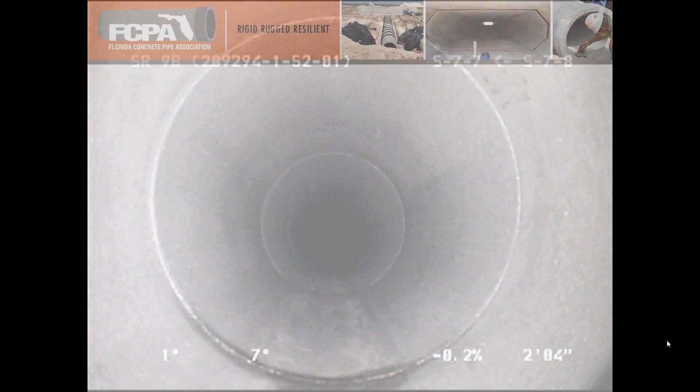Okay, thank you, Kim. So our webinar for February is post-installation inspection, where the rubber meets the road. And I'm one of your presenters today.

My name is Doug Holdner. I'm director of the Florida Concrete Pipe Association, which is basically a state chapter of the ACPA. And you're getting 3 presenters for the price of 1 today.

I've got with me Angel De Jesus with County Materials, a pipe producer. They're national, and they are with me here in Florida too. And then also Sarah Mayton, also with a pipe producer, Rinker Materials.

So let's start off with some brief introductions so that you know a little bit about your presenters. I have 23 years of civil engineering experience. Some of that was with consulting firms, and I was with a concrete pipe producer for about 13 years.

And for 3 years, I've been the director of the Florida Concrete Pipe Association. While with the pipe producer, I spent about 10 years doing quite a few post-installation pipe inspection assessments and reports.

I'm a licensed professional engineer in 2 states, and I'm a Texas Aggie, and I reside in Jupiter, Florida.

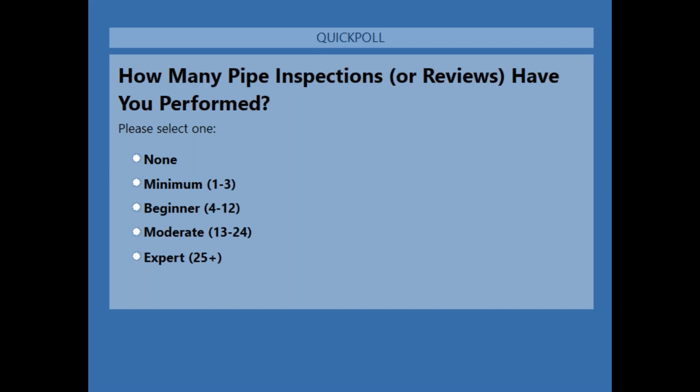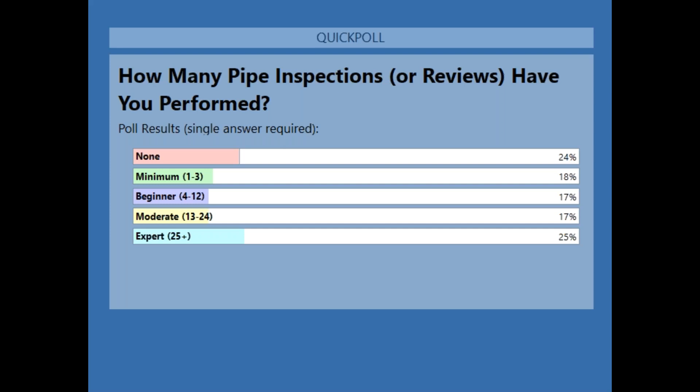All right, so again, we've had close to 90% answer. I'm going to go ahead and close that one and share the responses. So it looks like we have a good variety, Doug. 24% said none, 18% 1 to 3, 17% 4 to 12, another 17% 13 to 24, and another 25% are experts. Okay, great. So we have a very diverse audience in terms of background and also experience on this. Thank you for taking those two polling questions.

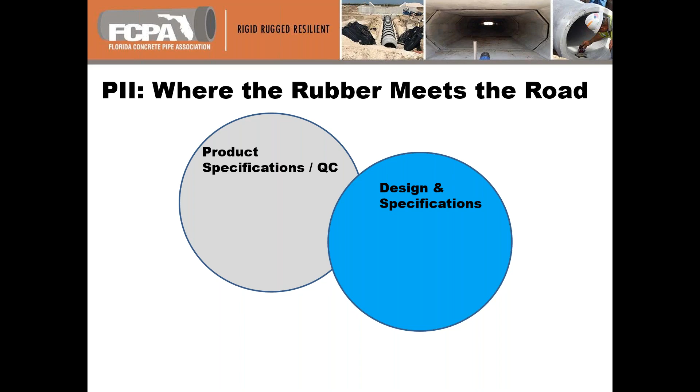So now why did I call this Where the Rubber Meets the Road? Well, if you think about a storm drainage project, it's a combination of different aspects. One is the product or the concrete pipe specifications. What I mean by that is that pipe is produced to certain specifications. For instance, it may be specified as a class 3 strength. So that is something that will be vital or important to the project. And then there'll be the design and engineer's specifications aspect of the project. That could be the minimum or maximum allowable fill depth for the pipe. It could involve the soil types specified for the embedment, like A1 or A3, and the compaction limits. It could be the defined areas of the embedment up to the spring line, or for flexible products, to 6 or 12 inches above the top of the pipe. And then the contractor has to execute the installation and follow those specifications and do a proper installation of the storm pipe.

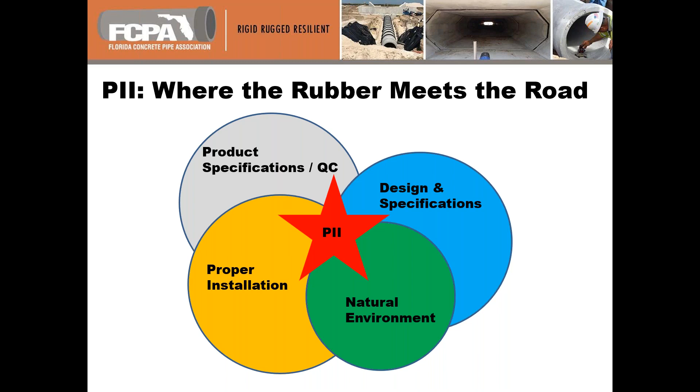And then you have a fourth element, and that's the natural environment. What I mean by that is you could have natural conditions like high groundwater table above the invert of the pipe. The groundwater could fluctuate seasonally, and you could have tidal influences. In some areas outside of Florida, you could have freeze-thaw conditions. You could have heaving soils. You could have very cold temperatures like you may have right now in February, and those could affect the brittleness or ductility of the pipe product possibly. And all four of these elements really culminate into that final opportunity to visually inspect the pipe in the post-installation inspection process. This gives the engineer the opportunity to assess all these factors and how they may be impacting the condition of that pipe before it's put into final service.

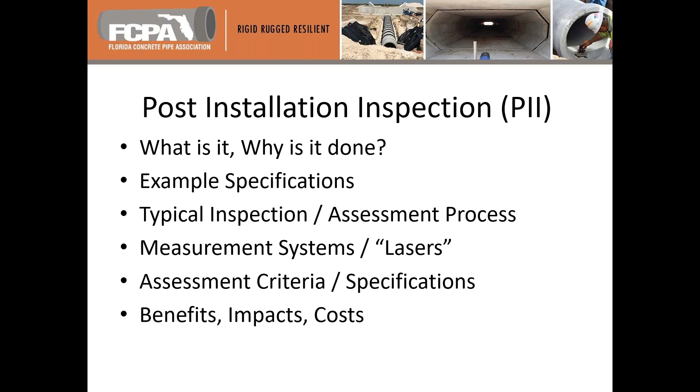Our agenda today is going to be what is post-installation inspection, for those of you who may not be familiar, and why it's done. We have some example specifications from agencies around the country. We will talk about the typical inspection and assessment process, and we'll talk about some of the equipment and components of inspection, for example lasers and measurement systems. And there's assessment criteria and specifications for rendering opinions of the observations. Then we'll conclude with some discussion on benefits, impacts, and costs.

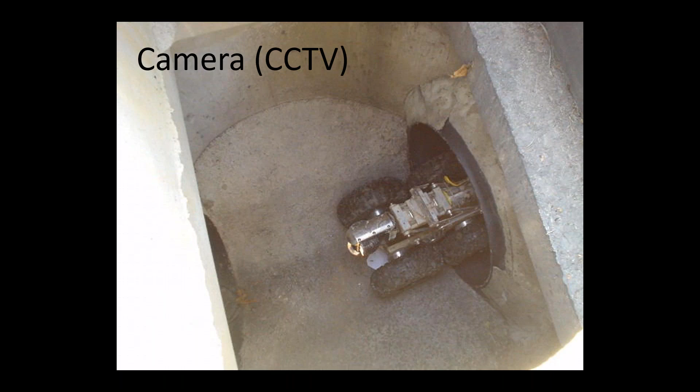Post-installation inspection at its basic level involves running a closed-circuit television camera mounted on a crawler through a storm pipe that has been newly installed. You can see that here with the camera entering a drainage pipe. Now the cameras come in a range of sizes because pipes come in a range of diameters. You may be inspecting a 12-inch diameter pipe, or a 48-inch, or maybe even a 60-inch diameter pipe, and it's important that that camera be centered in the pipe. Therefore you have a range of crawler and camera sizes like you see on this image here.

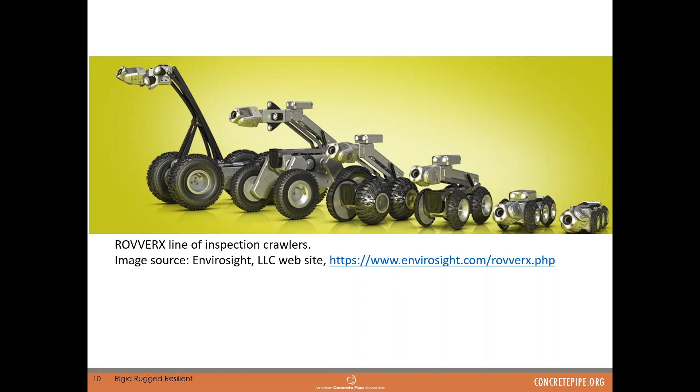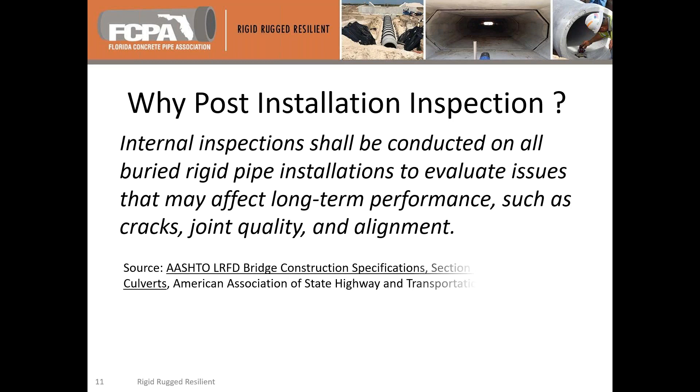Now, some of you may be wondering, why do post-installation inspection? This is straight out of AASHTO, and essentially for a concrete pipe, you want to assess the condition of the pipe and look for any type of structural distresses like cracks or joint quality, joint alignment, because you want to look for things that may affect the long-term performance of that pipe. That is a definition straight out of the AASHTO LRFD bridge construction specifications, section 27.

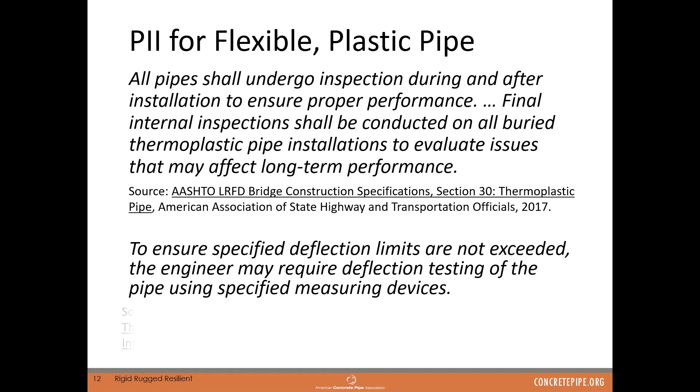Now for flexible pipe like thermoplastics, it's equally, if not more so important. The engineer should be inspecting the shape and any potential deformation of that pipe that could affect its long-term performance. There's similar language in AASHTO LRFD as well, section 30, and similar language illustrating the need for post-installation inspection for deflection limits in ASTM D2321.

Now, sample specifications. There are quite a few agencies around the country that require post-installation inspection. This is out of the Kentucky Transportation Cabinet Standard Specifications, Section 700. Kentucky requires that camera video inspection be done on all projects that have more than 250 feet of storm sewer and an ADT greater than 1,000 vehicles. I suspect quite a few projects would fit that minimum criteria. What they are doing is inspecting 100% of pipes that are under the road and 50% of pipes that are not.

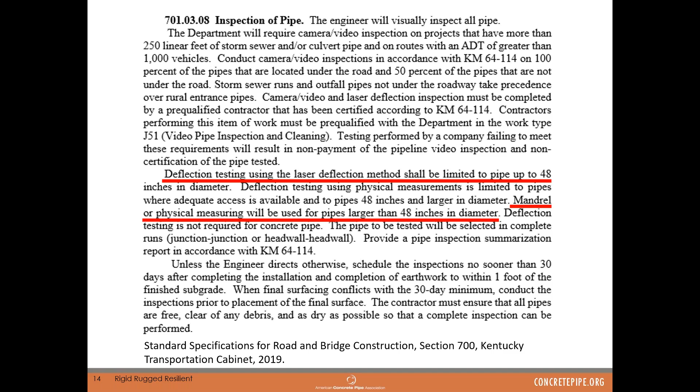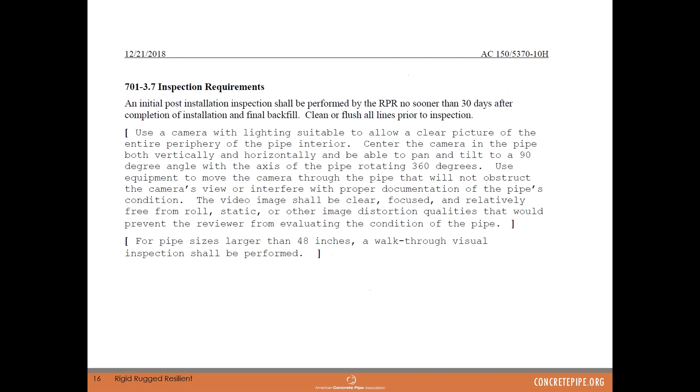They require that the video inspection contractor be pre-qualified, and then they require deflection testing for flexible pipe up to 48 inches in diameter. For pipe larger than that, they require some type of physical measurement or a mandrel to inspect for deformation. The Federal Aviation Administration, through AC 150, also requires post-installation inspection, and they stipulate no sooner than 30 days after the final backfill.

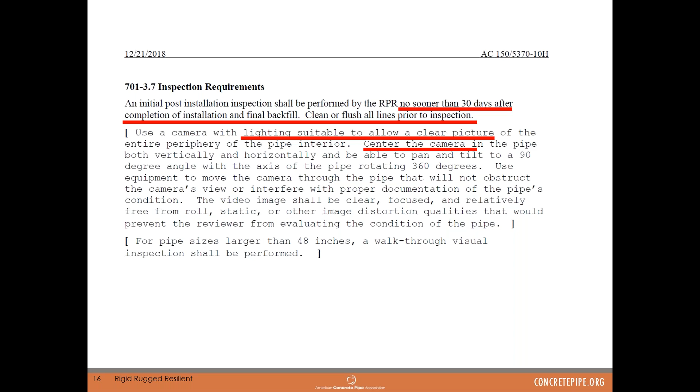They also want the system to be cleaned and flushed, and this is very similar to what you would find in the AASHTO specifications as well. And then, of course, you want suitable lighting so that you have a clear, visible image of the pipe, and like I mentioned earlier, the camera should be centered in the pipe.

Our home base of Florida has required post-installation inspections since 2006, and their spec requires that pipe that's 48 inches or less in diameter be video inspected. They want a video recording and also a report of observations in the pipe, such as cracks and joint gap measurements, tears, and things like that. For flexible pipes, they have the additional requirement of a pipe ovality report.

And I'm going to turn it over to my colleague Sarah and ask Sarah to describe the typical inspection process for a concrete pipe, from the time a CCTV camera is deployed in the pipe all the way through when you've been given a video and report to assess.

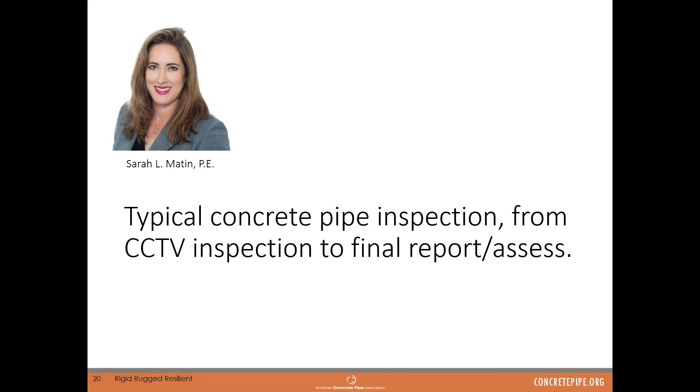So basic process: we typically will see the inspection done after it's been backfilled. The pipe is dewatered, which is very critical here in the South. Make sure it's clean, and that's important because we want to be able to see what's going on in the wall of the pipe. If it's dirty, it's more difficult.

For the CCTV, they're going to look at any imperfections that the videographer notices, so there is a little bit of judgment there. The report's only going to show what the videographer looks at. So it's important that you have someone who is experienced and certified, maybe NASSCO certification.

They're going to look at all the joints, take measurements, and we recommend that if they see a joint that is out of tolerance, they provide more than one measurement, a minimum of 3, so that an evaluation can be made if that joint is actually out of tolerance or if it's just a little askew at certain areas.

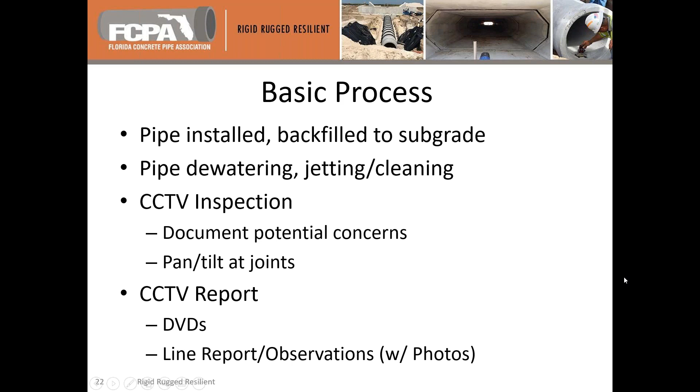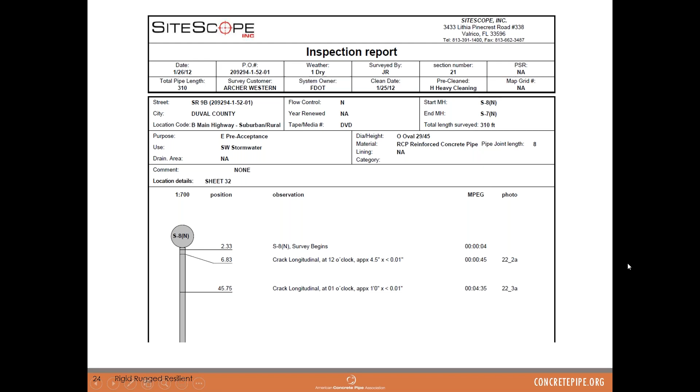Normally we just go through the report in areas where they call out deficiencies. We're not going to look at every foot of pipe—it's just not feasible. So if the videographer doesn't capture it, it might not be something that's looked at by a specialty engineer.

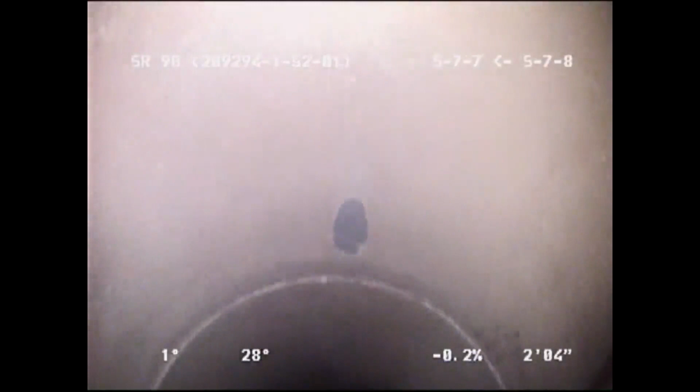All right, we're back. Here you can see the barrel of the pipe. The camera is panning around inside to give us an idea of what's going on. You can see a little bit of dampness, but that might just be at the bottom of the pipe. A little disoriented, there you go. Yep, so that's just at the bottom of the pipe. Looks nice and clean, no standing water, and that's per specification.

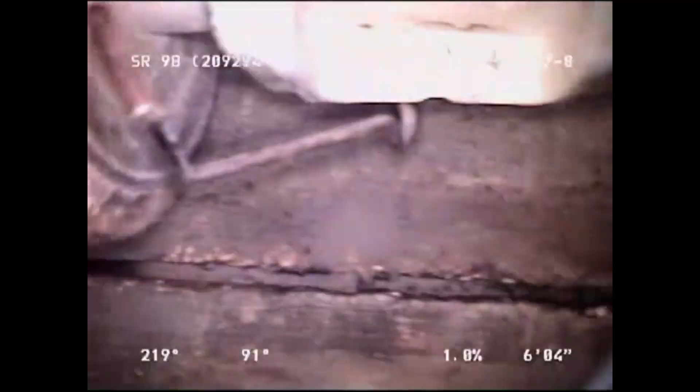We're going to go up and pan the joint and take measurements after we pan the entire joint. Yeah, that video doesn't show the entire joint, but it would go all the way around 360 degrees. Make sure you take a look at it first, and then provide measurements as required for whatever size pipe that is, and your municipality.

So continuing, once the report is done and the videographer has submitted that to the subcontractor or the prime, depending upon the job, if there are areas that need evaluation, that will be sent to a specialty engineer. A specialty engineer typically is someone employed by the manufacturer of that particular pipe. That's important because that person needs experience in the structural capabilities and design of the pipe so they can accurately evaluate cracks, infiltrations, and joint separations, if occurring, and provide that evaluation. During the report, there will be an area where repairs could be recommended depending on the municipality and what's required. Then the contractor, once repairs have been made, will need to re-inspect to make sure those repairs were adequate.

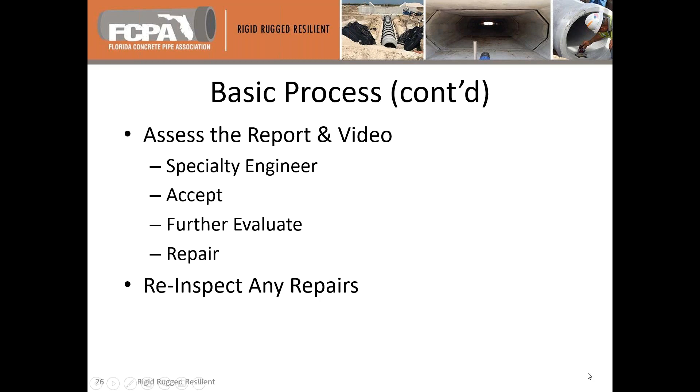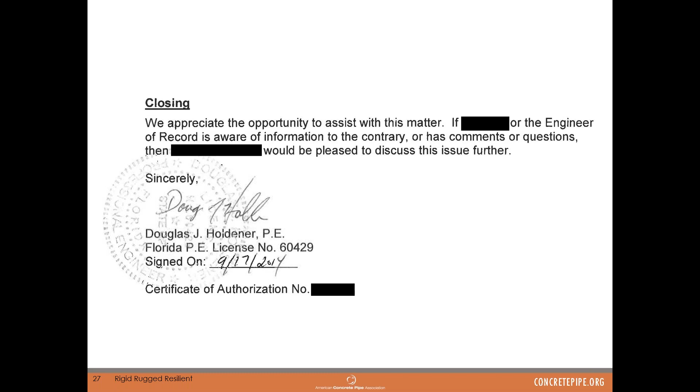All right, thank you very much for that, Sarah.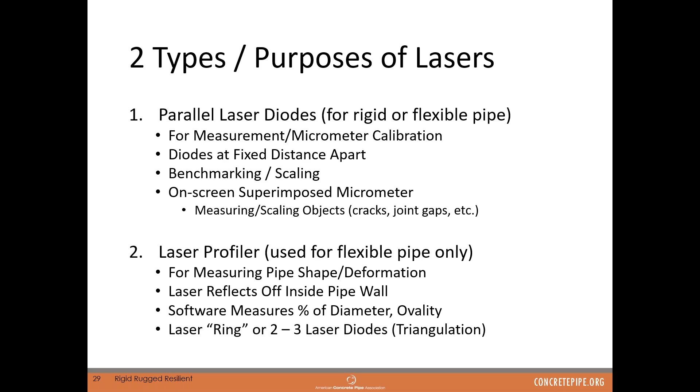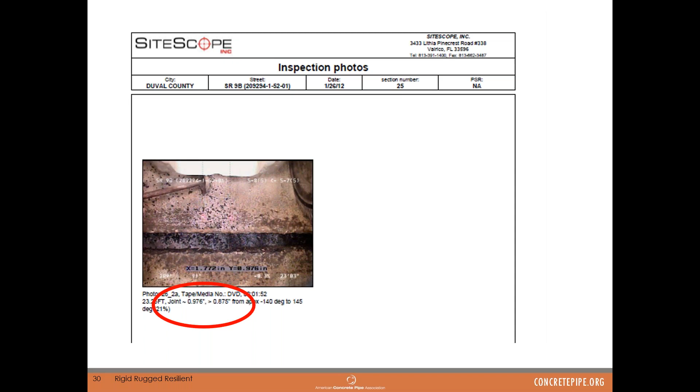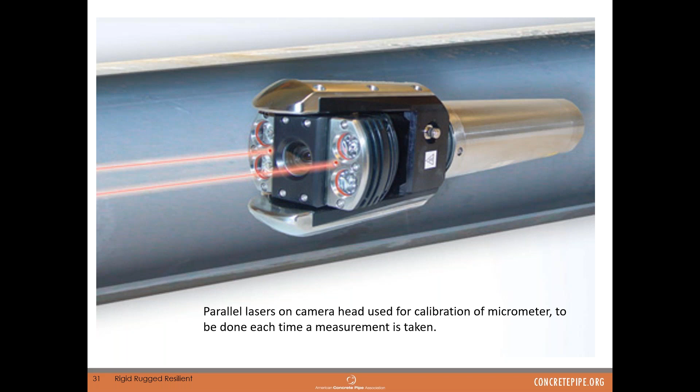So in the case of a micrometer and laser diode setup, if you have a situation where there's a joint gap—in this particular one, the contractor has measured a gap of about 0.9, or roughly under an inch—they did that using a micrometer calibrated with two parallel laser diodes like you see here. These diodes are mounted on the camera face, pointed 90 degrees at that joint gap. I'll show you what that looks like here. You can see the image of this concrete pipe wall, and you see two laser dots right there—those are those fixed laser diodes on the camera head.

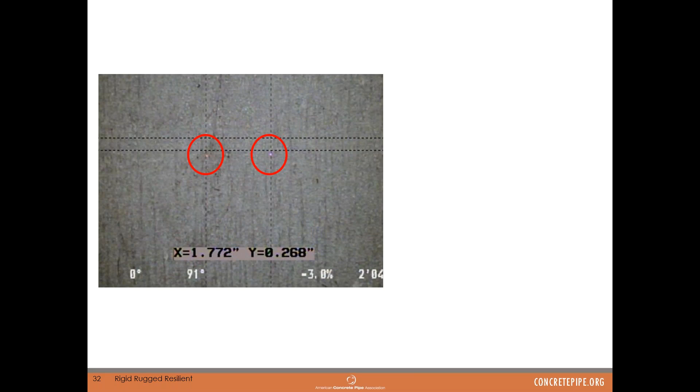And then the black dashed lines are the micrometers that are superimposed on that camera image, and they run through the little laser diode. That's the calibration process. Then the camera operator maneuvers those micrometers to the edges of the joint or the edges of the crack in order to do that scaling measurement.

There are other types of systems with the same premise. They may have a crosshair pattern to them. But the important thing to take away is that it's critical for measurement accuracy that the calibration step be done each time the camera is moved, panned, tilted, or zoomed. It must be done each time, and it must be 90 degrees perpendicular to the object being measured, or it will greatly impact the accuracy of the measurement. So I'm going to show you a video of a joint gap measurement so you can get an idea of this in action.

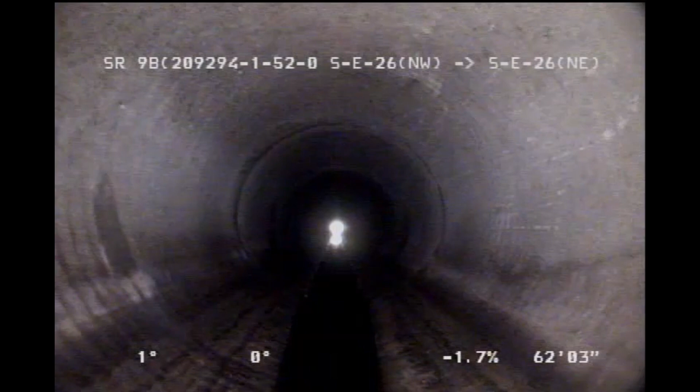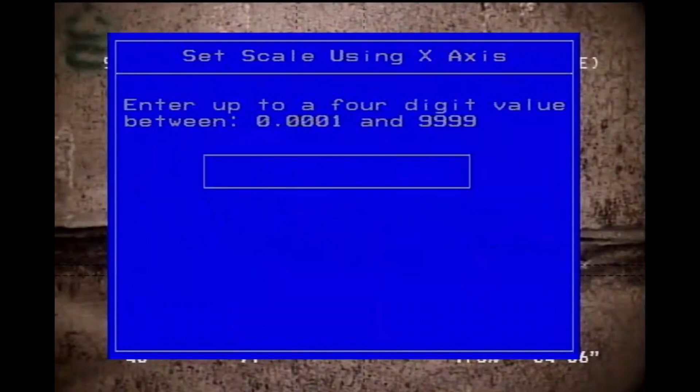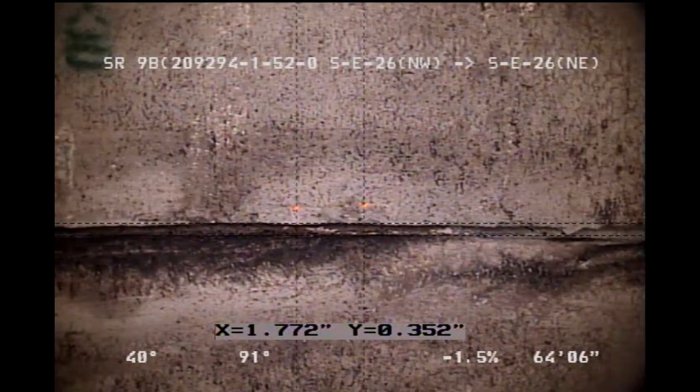So you have a camera, you come up to a joint, he's panning and tilting at the joint, and they're going to use the dashed black lines to measure that joint gap. But first they have to calibrate them, so they're positioning those lines through the laser diodes. They're calibrating, the diodes are 1.772 inches apart. Now the micrometer's calibrated, they can maneuver the black lines to each side of the gap, and they record an estimated measurement of about 0.35 inch. So that's the calibration process and the micrometer measurement process.

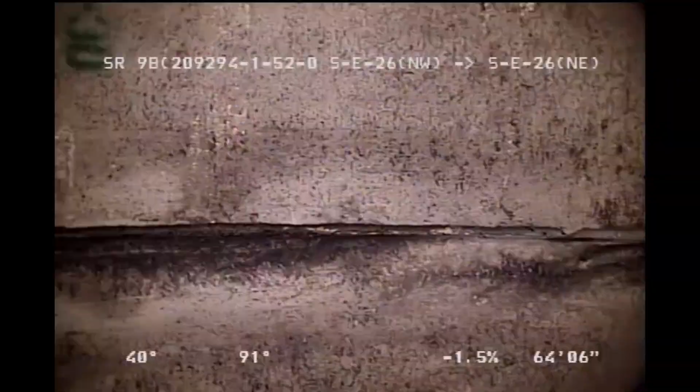Now the other type of laser equipment is the laser profiler, and this is a profiler that you see here on the screen. This is for measuring deformation, so it's best to show another video so you can see how these things are used.

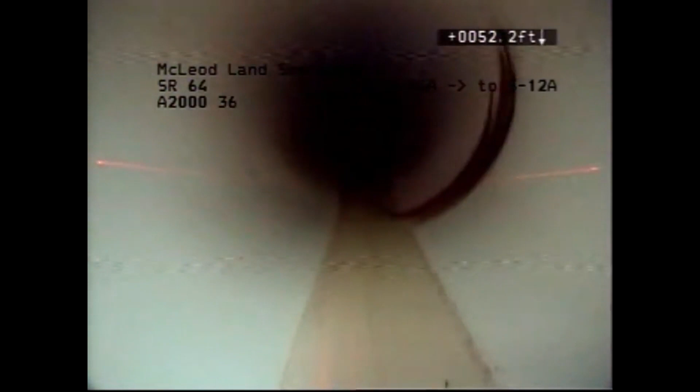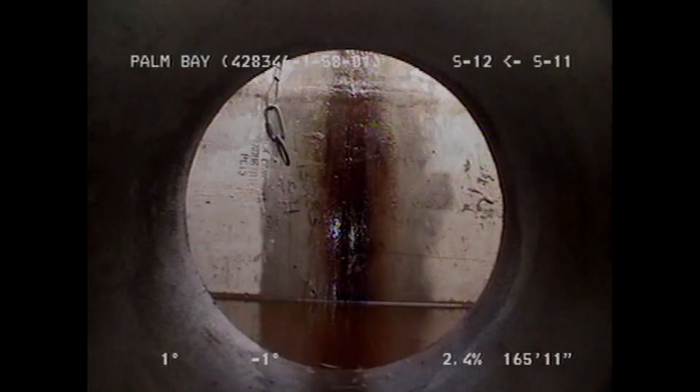That's the wrong one. Hang on. Got ahead of myself.

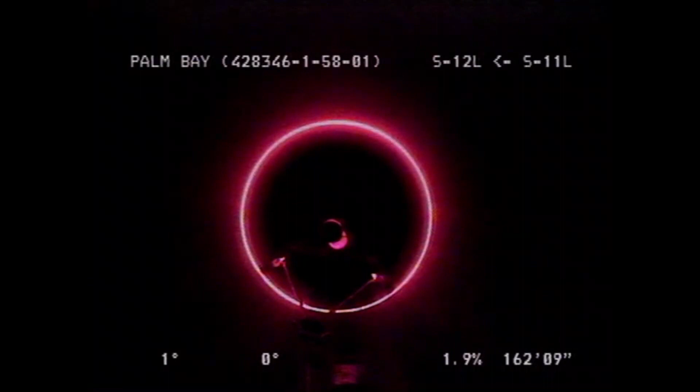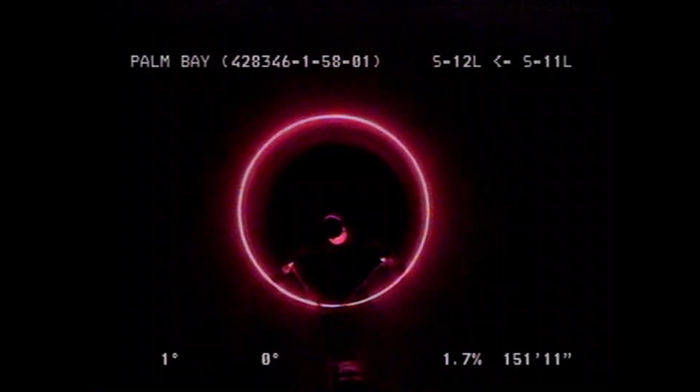Okay, so the CCTV part of the inspection's been done. The contractor now connects the laser profiler to the camera and is going to pull that through the pipe. The software is evaluating this reflected laser profiler image off the interior surface of the pipe. Now, you're probably thinking there's not much happening to the shape of the profiler in this case, and you're right. That's because this is being done on a concrete pipe. Concrete pipe being rigid, there's really no reason to do a laser profiler inspection on a concrete pipe.

So they're generally used for flexible pipe like metal, HDPE, polypropylene. This is an image of a laser profiler in a flexible pipe. You can see the red laser reflection showing some severe deformation in that pipe, and the green image would be if the pipe were truly round.

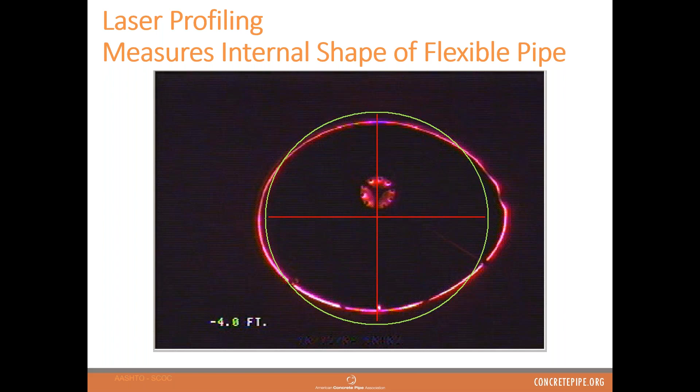Now, we often get two basic questions about laser profiling. One is, why laser profile in the first place? Why not just look at the pipe or lamp the pipe? The reason for laser profiling is that it's virtually impossible to detect actual deformation until you exceed 10%, which is much higher than what your typical acceptable limit would be. So that's the answer to question number one as to why laser profile.

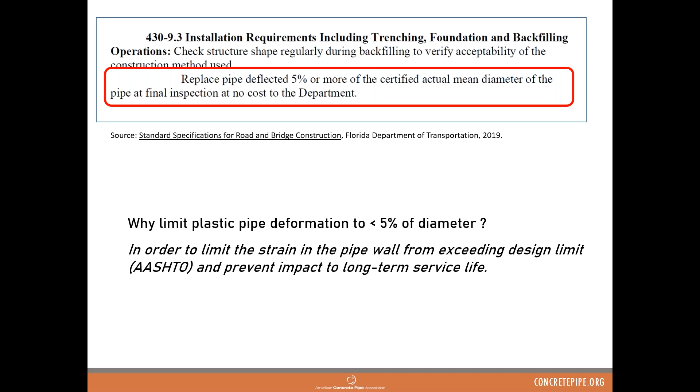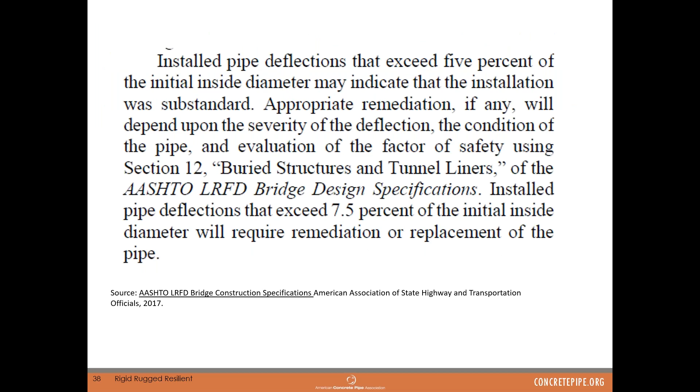The other question we're often asked is why limit it to 5% or less than 5%? The reason for limiting deflection to less than 5% is that you're really limiting the strain in that pipe wall. If the deformation exceeds those limits, you could have a case where you've exceeded the design strain limit of the pipe, therefore impacting its long-term service life. You could find further explanation of that in the AASHTO LRFD bridge construction specifications if you so choose to look that up.

Okay, so my other colleague, Anhil, why don't you walk us through some of the typical issues that may be observed in a post-installation inspection report? Definitely, it will be my pleasure to do.

Typically, when we review a pipeline video inspection, the surface area of the pipe, we normally only observe probably less than 2% of that surface area having any degree of observations that may need to be evaluated.

When we are performing these reviews, we have to be concerned with the fact that if the TV inspection was performed in accordance to the specifications, particularly the speed of travel of the camera inside the pipe, and if the operator is stopping at each joint and fully panning 360 degrees the circumference of every joint. That's important because we like to observe the condition of the joints in full. Typically, that's the critical area of any pipeline system, regardless of its application.

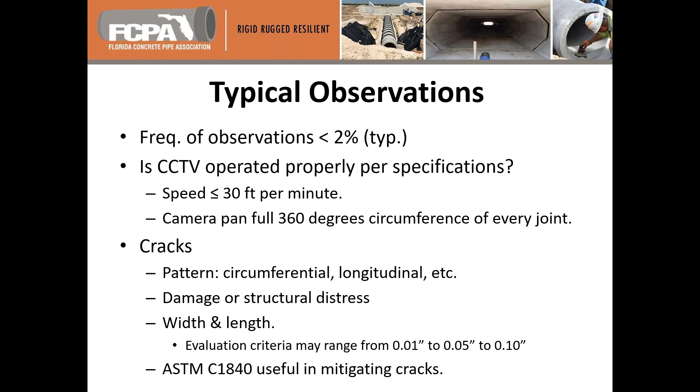When it comes to cracks, we are looking for patterns. They can be either circumferential or longitudinal, damage or structural distress on the wall of the pipe, the width and length of those cracks in accordance to the recognized specifications, either by AASHTO, ASTM, or local DOT specs. It's very useful to be acquainted with ASTM C1840 in order to understand the remediation that may be required for each one of those observations.

When it comes to joint gaps, some agencies have maximum joint gap criteria, which are, for the most part, in my experience, very useful. But you also will like to consider the allowable additional extensibility that the supplier or manufacturer joint design may provide, since obviously we don't want to be mitigating joints that may not need to be remediated.

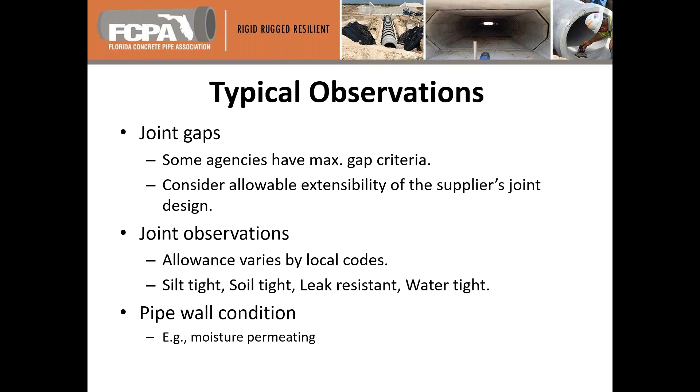Joint observations allowance varies by local codes. Some owners require silt-tight joints, soil-tight joints, leak-resistant, and watertight being the most stringent. Pipe wall conditions include moisture permeating through the wall, and again, ASTM C1840 is very useful in remediating those.

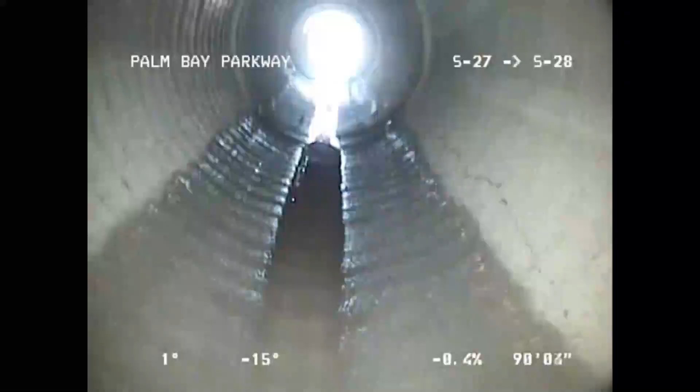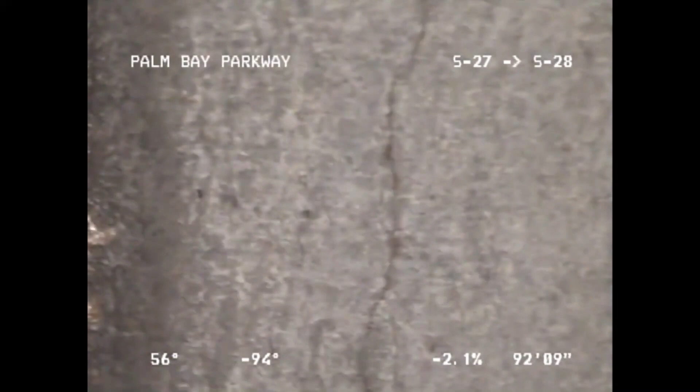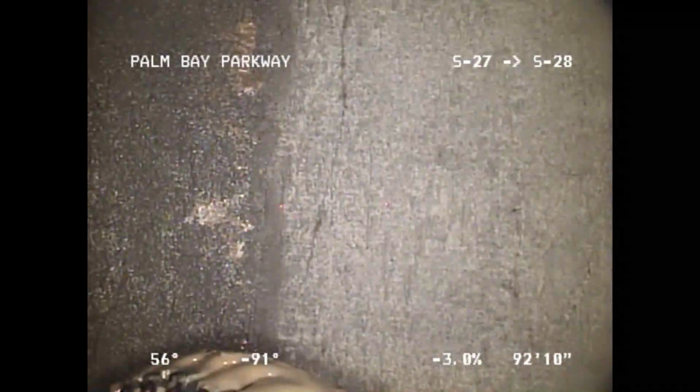I think we are about to show you a video of a longitudinal crack on a pipe. And here we go. You can see the camera that is mounted on those wheels traveling through the pipe and looking perpendicularly to the location of this crack observation. At this point, there has not been any measurement taken. I believe that we can probably at some point observe the dials of this micrometer equipment on the surface of the pipe.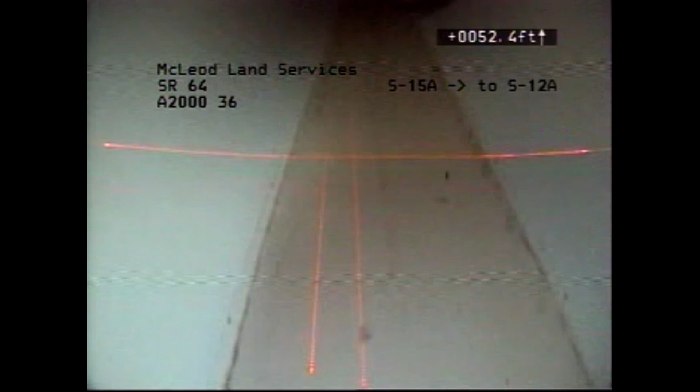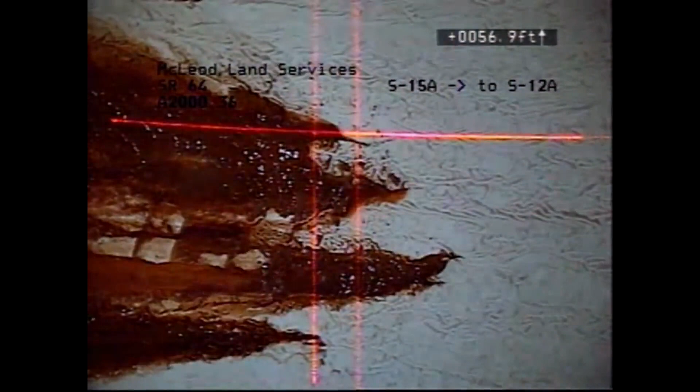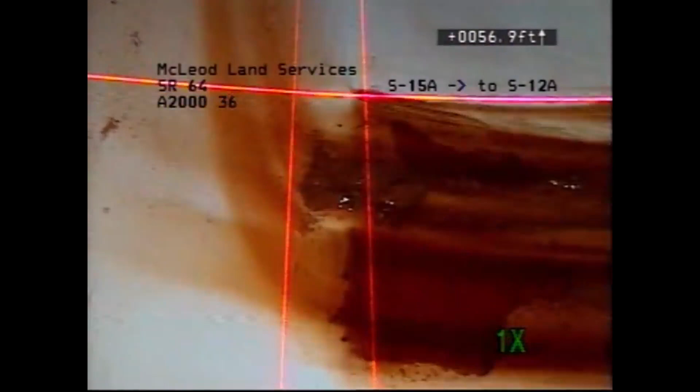Okay, so here we go with another video that we have on pipe permeability. Notice the stains on this particular pipe. This is a very controversial subject on many occasions because the typical perception will be that there may be some corrosion taking place on the wall of this particular pipe.

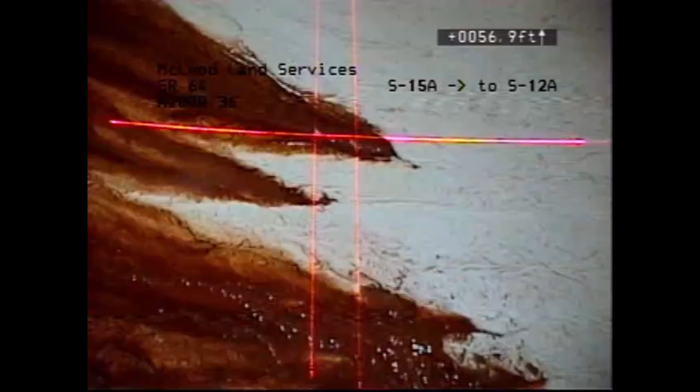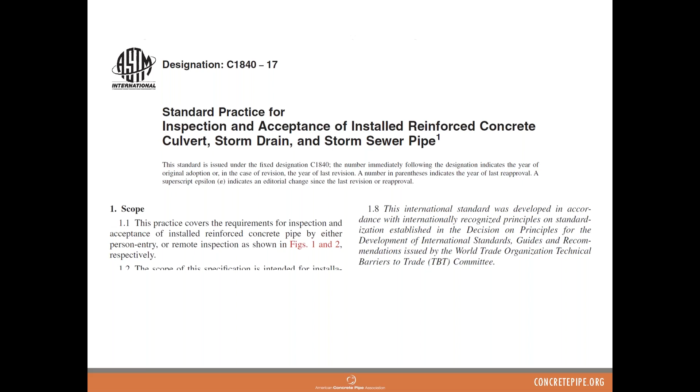So in May of 2017, ASTM C1840 was developed by industry, and industry professionals peer-reviewed this standard, and it really created a document to rely on as to what to expect when doing video inspections and what should be acceptable and what should not be acceptable. This is only for concrete pipe.

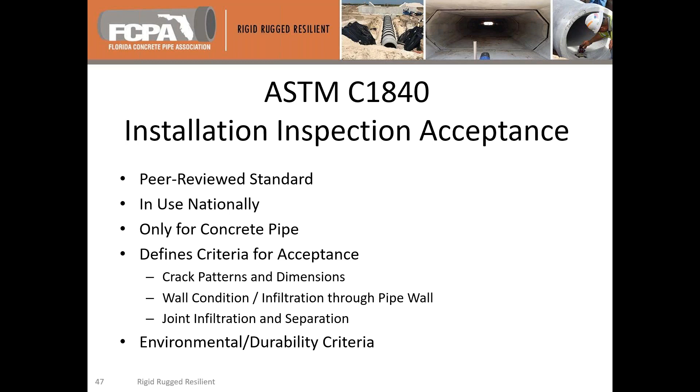It reviews crack patterns, size, width, length of cracks, where the cracks were occurring, wall conditions as far as water passing through the pipe wall, joint separation, different types of anomalies with the joint based on criteria, as Angel mentioned, if they're watertight, soil-tight, leak-resistant, and also including environmental factors such as soil conditions, corrosive properties, resistivity, sulfates. So there are some items in there that may or may not affect concrete pipe.

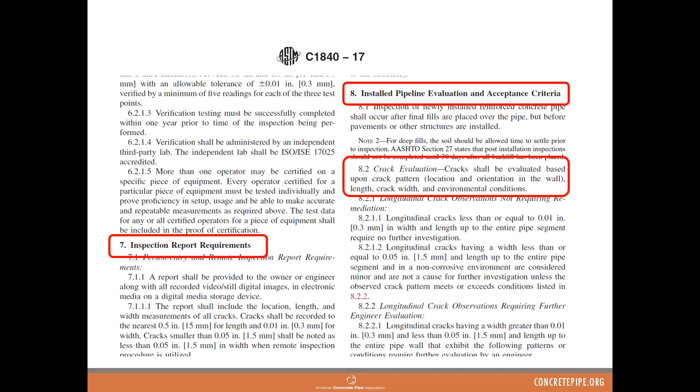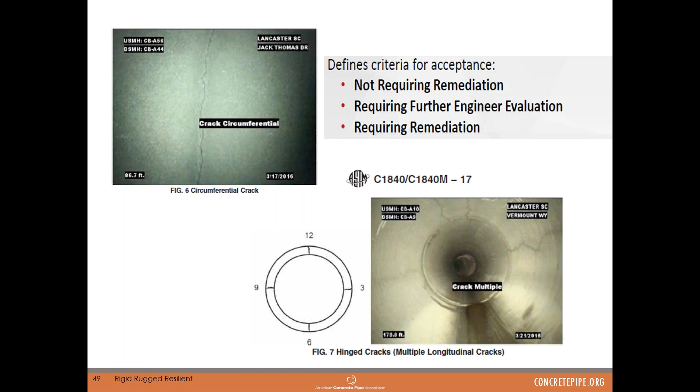And that's very important because depending upon where the cracks are located, it's easy to figure out what happened to that pipe and if that particular crack is acceptable based on either it had a point load, and you're seeing that loading on top or bottom, 12 or 6 position, cracking in the 9 and 3 position based on levels of correct compaction, and whether those cracks are significant, if they've passed through the pipe wall, if they haven't. So that's very important because it's not just using anecdotal evidence, it's going back to the design of the pipe.

And I like to compare that to when we do roadway stationing. If I say there's a vertical object at 25+00, 50 foot left, people know where that's at, whether you're in the office or you're in the field. So it's a similar nomenclature for all people who are reviewing pipe. So this is very important for that common terminology.

And you can see here we reference back to the advisory circular that the FAA provided at the end of December of 2018, which now requires ASTM C1840 to be the standard to which concrete pipe is inspected, which is really helpful. And a huge agency like FAA using this is positive for the industry to know that other agencies can rely on this to be an accurate and trusted criteria specification.

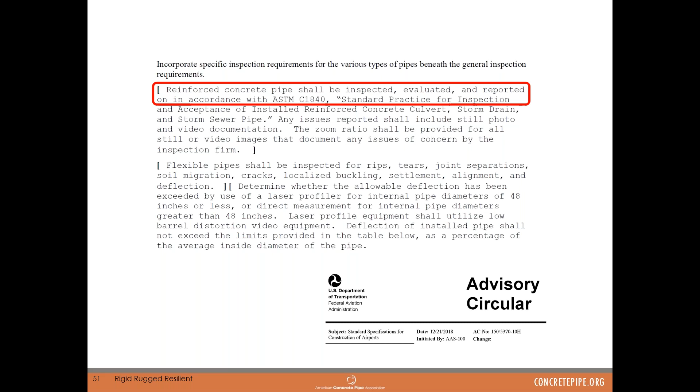Great, thank you, Sarah. Anhil, why don't you share for those members in our audience that may be considering or in the early stages of a post-installation inspection requirement, talk a little bit about the benefits and impacts that you've seen it have on the industry overall. Sure.

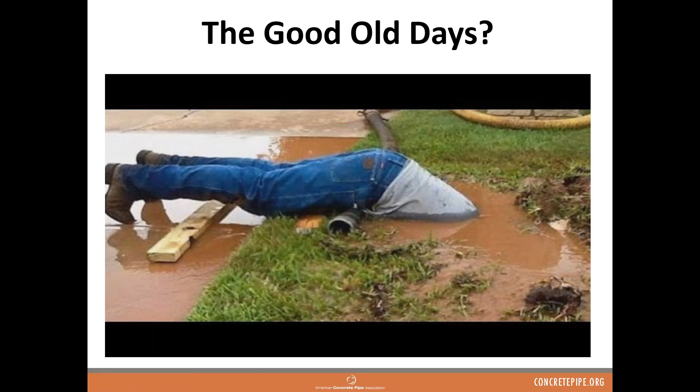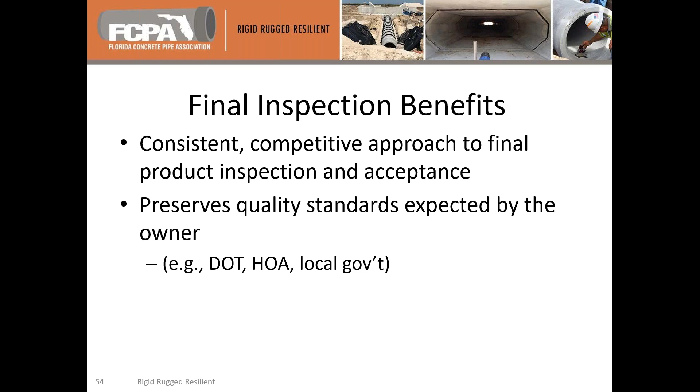Well, that's the way we used to do it in the old days. We don't do that anymore thanks to CCTV inspections. Final inspections of pipelines bring a consistent, competitive approach to final product inspection and acceptance. It helps all the stakeholders involved in the construction and final acceptance of that pipeline. Obviously, the whole intent is to guarantee and safeguard the longevity of the performance of those pipes. It helps preserve the quality standards expected by the owner, regardless if it's a DOT or a homeowners association or a local government. It plays very favorably in preserving those standards and those expectations of the pipelines.

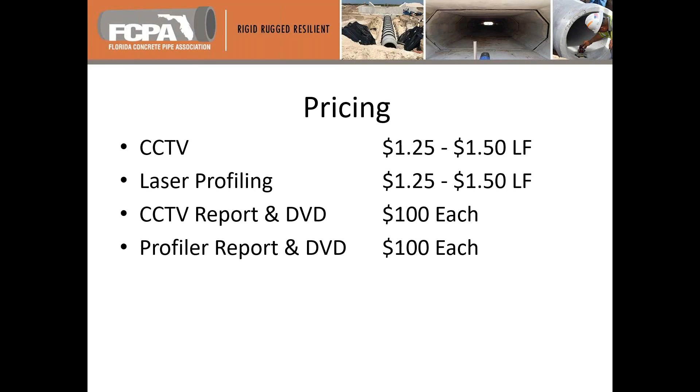Okay, well, this is taking us to the wrap-up stage, and I want to share just some final thoughts on post-installation inspection. One is, I imagine some of you in the audience are curious about how much it might cost, whether you have limited experience with this or just want to know what it costs compared to your market. Now, these are some recent pricing from Florida. Keep in mind that Florida is a very mature market. It wouldn't surprise me if there's close to 24 contractors doing this type of work. Plus, a lot of the underground utility contractors do their own inspections. So it's a fairly competitive market space.

But the CCTV itself has a price per linear foot. There's typically an additional cost for the need to do laser profiling on flexible systems. There's some modest cost to putting together the report and compiling the videos. And depending on how much debris is in the line and there needs to be desilting, you have expenses there and for dewatering. Now, I've heard reports from other areas of the country that are more expensive, and that doesn't surprise me. Like I said, Florida is a mature market, but I've seen pricing from Midwestern states that range from $1.75 to $4.75 for 15s and 18s, and anywhere from $2.25 to $11 a foot for 30-inch and 36-inch, and $4 and on up for 48. So just to give you some sense of the price of doing this.

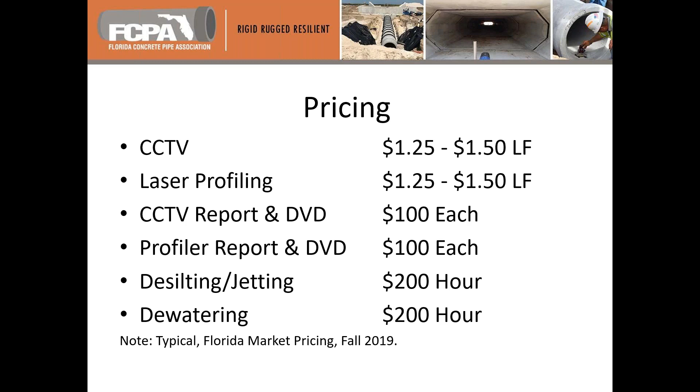How often is post-installation inspection required? So how often is post-installation inspection required? Well, I can answer for Florida, and you can maybe draw your own inferences from the map that we showed a few moments ago. For Florida, it's 100% of the time on FDOT projects. There might be a few extreme circumstances on a very short driveway run or something, but it's, for all practical purposes, 100% of the time.

Now, for all the 67 counties and municipalities and even private projects within Florida, it is maybe not 100%, but it is a tremendous percentage of those projects as well. So most agencies have followed suit with doing the CCTV and the laser profile inspections, even on private residential subdivision work. So that's Florida's perspective.

Yeah, and I would say, Doug, it varies by state. Many of them do 100% for new installation. Some of them will specify a particular percentage that's done, and then if there's issues found, they require 100%. They also have some specifications that will require it. I think Doug pointed out one of the specifications talking about no sooner than 30 days after final backfill. That's pretty typical of what we see across the nation.